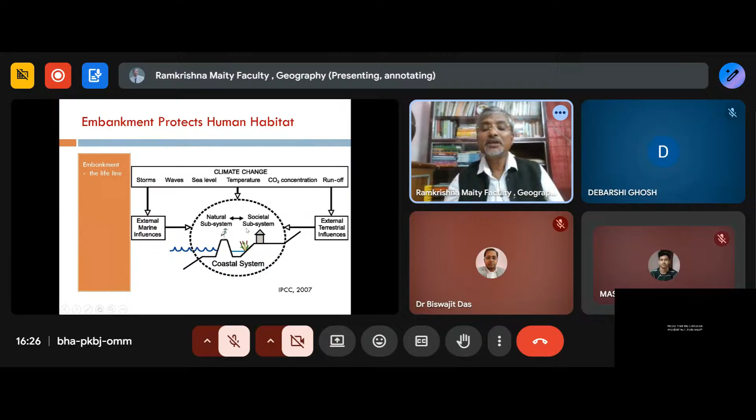Now sometimes this becomes inappropriate. If we take the example of Indian Sundarban, land was reclaimed by construction of embankments along both sides of the tidal creeks. So embankments were constructed and vegetation was cleared. Erection of embankments and clearing of the forest are two simple mechanisms for reclamation. And this embankment is considered the lifeline of the Sundarban because it differentiates between the saline environment and the socially constituted freshwater environment.

And this technique was borrowed by the British from the Netherlands. You know the polder land. In the Netherlands, this principle was practiced since 1609. And in the 18th century, the British brought this technology for the reclamation of saline or intertidal land in Sundarban. You see the health of the embankments in the Netherlands, how they are maintaining their polders. And side by side, you see the health of the embankments in Sundarban. We are not maintaining it.

Even without any high tide or storm surge, this embankment is unstable. Self-instability is there. They will break by themselves. There is no requirement of storm surge and high tide. This is how the people are protected. And when Aila came, kilometer after kilometer of embankment was destroyed.

Sometimes it is unaffordable too, because huge capital is required to construct such a strong embankment. And this technocentric management reinforces conditions of underdevelopment, exploitation, and poverty. How? Because most of the foreign aid is siphoned off by corruption. Most of the available capital is spent on sophisticated technology. And then the poor who are actually affected don't get much for their recovery.

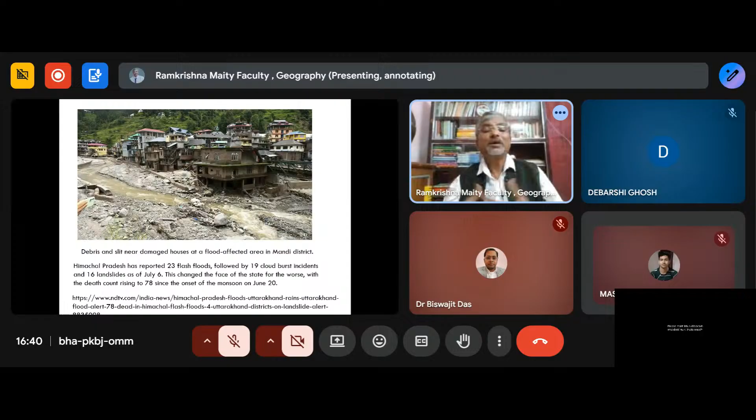And if you look at this picture, say it is the river, and people enter into the river. They don't give any space to the river, and a small embankment was constructed. And people found that this is a protecting structure. Okay, and in this condition, if disaster occurs, then whether the disaster is responsible, or the natural forcing is responsible for the damage, or the other forces, you have to think about it.

And while a river emerges from the mountain front, it has some characteristic change, because in the mountain, the valley is confined. So the river is within a confined valley. And while it comes to the piedmont mountain front, it becomes partly confined or laterally unconfined. So this boundary condition, it is the permanent boundary condition, or say imposed boundary condition. This boundary condition is changed, and with this change of boundary condition, the entire character of the river is changed. So this we must understand before understanding the flood situations.

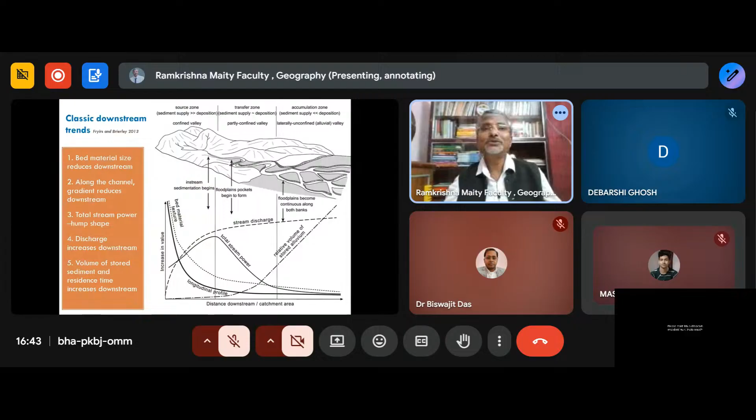Okay, these two things we must remember to understand the nature of the flood and the character of the rivers. In Tista, Torsha, Raidak, Jaldhaka, Kaljani, Sankosh, they have numbers of abandoned channels and back swamps and changing courses because of this. And what is their effect? All those back swamps, all those earlier channels, those are blocked or those are occupied for other purposes. Okay.

The recent report of India Today shows that abandoned channels sank from 24.87 square kilometer to 9.01 square kilometer during this period. 104.05 square kilometer of channel is turned to farmland, and 85.90 square kilometer of the channel land is transferred into built-up areas for Raidak only. Torsha also lost much of its old channel to farmland. Kaljani and Jaldhaka are heavily embanked rivers, and Tista is also disconnected from its wetlands and other channels.

So while much of the discharge comes with this much of energy, huge energy, then that has to be intercepted, that has to be received by some space and some techniques. What are left there? Nothing. There is the blockage by settlement, there is the blockage by bridges, there is the blockage by culverts, and the channel becomes narrower and narrower.

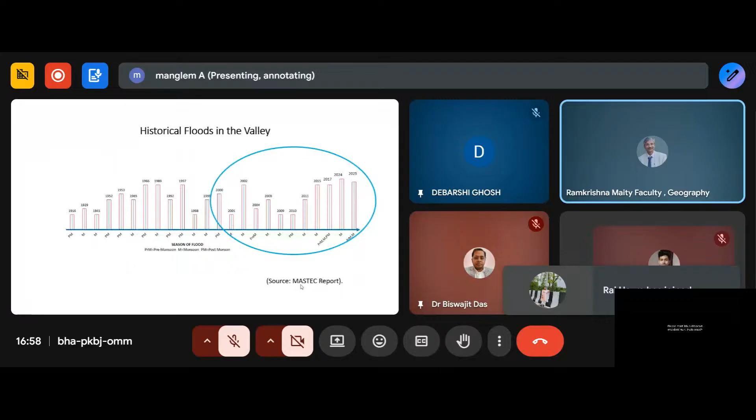Sir, you go for the presentation mode from your PowerPoint. PowerPoint is already open. Yes, you please open the PowerPoint. Click the PowerPoint. Go to the PowerPoint mode. At the bottom ribbon, at the lowermost ribbon, right hand side. Near the volume bar, the cup-like shape, teacup-like shape. Yes, that one. Yes. You please now continue.

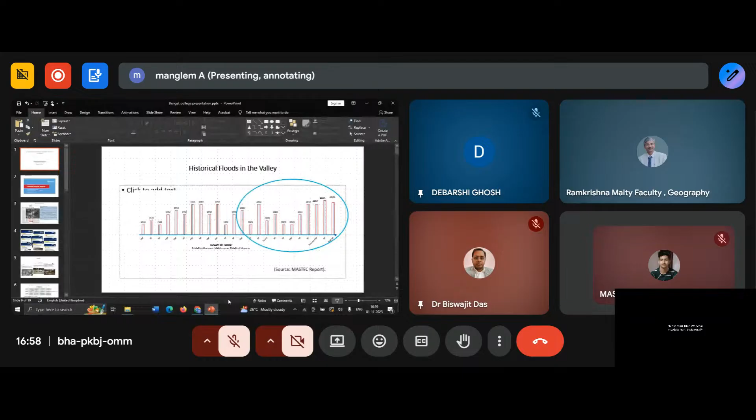But your voice is not coming, sir. Dr. Das, please contact him. Can we do one thing, Professor Ramkrishna Maiti sir? Until Professor Singh settles with this particular technical problem, can we proceed with the next presenter? Yeah. Why not? That would be fine. So Dr. Singh can fix that particular thing. So it would be better, sir. Okay.

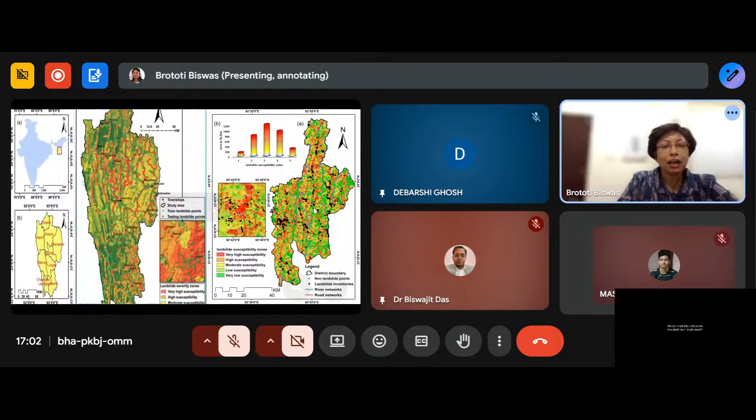So here in the slide, you can see the state of Mizoram. The landslide susceptibility mapping has been done, wherein you can see that most of the places fall under high to very high susceptible region. And particularly this zone, the Aizawl district, and this zone, Lunglei district. These two districts are having the maximum amount of landslides.

So in the inset, you can see this is part of Aizawl district. It is already in the very high to high zone, which you can see from the mapping and also from the various landslide points. In this map, from the various landslide inventories, one can easily understand the number of landslides that we are facing, and this is just a glimpse. There are many more landslides.

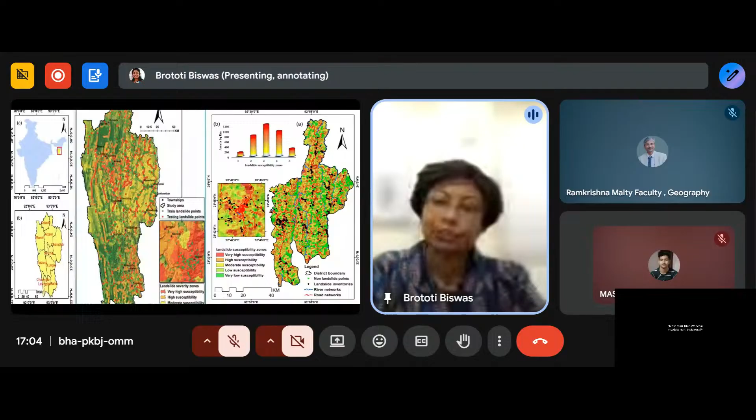There are some landslides which are repeatedly occurring. The area is going on increasing. And some landslides which may have occurred quite some time back are right now dormant. Again, it can occur. And again over here, the maximum part of the district falls under high to very high. This zone is the Aizawl city area, which is also prone to a number of landslide incidents. So in short, in Mizoram, the main population percentage is in Aizawl district, so the maximum persons are vulnerable to landslide, and not only landslide, to the various disasters.

Now, why does Mizoram get so many disasters? That is because we are in seismic zone 5. Since we are in seismic zone 5, we are prone to so many hazards, so many disasters. And just to give you a glimpse, only this year, only within 1 month, from May 24th to early June, Mizoram has reported around this many landslides.

Only in the district, there have been 5 deaths. So this is such a lot of hazard that the region is facing. So what are the vulnerabilities of our state? What makes it so disaster prone?

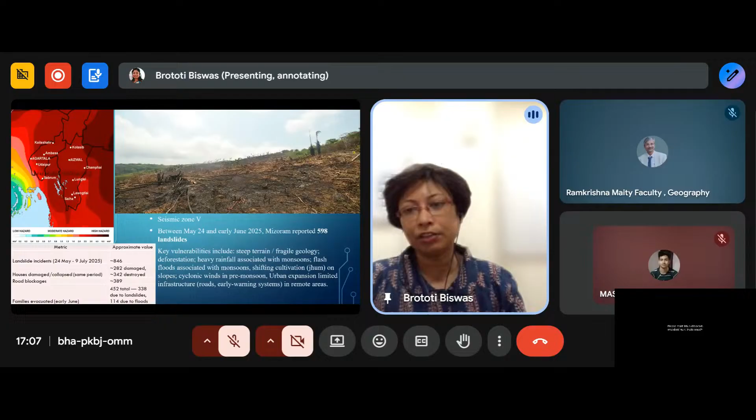So what is the anthropogenic factor? The anthropogenic factor is the jhum cultivation. We are aware that Northeast India has got shifting cultivation. So we have this jhum cultivation, and in this slide, you can see this is a jhum land. So in jhum land, earlier what used to happen is that they used to cultivate this for 3-4 years and then leave this land fallow for 10 to 11 years. So they used to follow this 10 to 11 year cycle. So in this 10 to 11 years, the forest would regenerate itself.

Ecology would re-establish itself. But now, because of land and population pressure, that short fallow cycle has started. So now it is no more 11. Now it is just 3 or 4 years or max 5 years. So the land is not able to regenerate itself. And something like this happens in the jhum. The entire surface and the subsurface area is totally destroyed. And I am saying the subsurface because what you are seeing over here are not twigs. These are the roots of the big trees.

And so the fire not only destroys the entire covered soil, it also destroys the roots underneath. When anyone goes to these jhum sites, we just see the skeletons of these trees, the root systems. So the entire slope is destroyed. There is nothing to protect the slopes. So that makes the slopes very much vulnerable. So when there is a triggering factor, heavy rainfall, obviously we have the landslides, we have the entire soil of this region being shifted downhill.

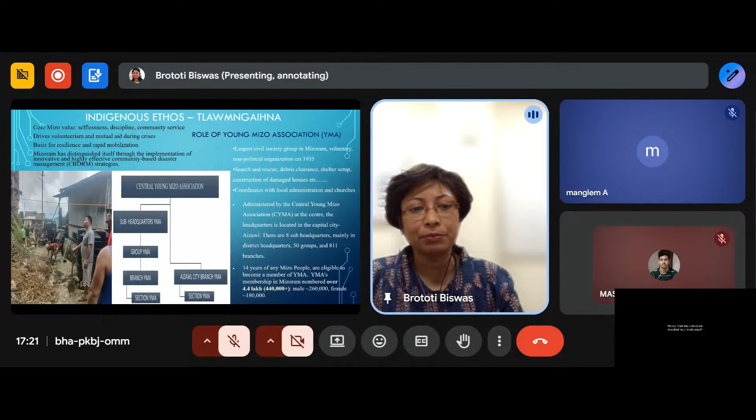So if there is a death in the family, it is these people, the YMA people, who come into action. They will stay back with the entire local group. They will stay with the family, with the deceased, with the dead body the entire night. They will sing, they will pray with the dead body, with the family members.

And not only that, because Mizoram is a Christian state, they will also take part in the digging of the graves, the funeral, the prayer meetings, everything. And they will supply food and all the other requirements to the deceased's family. So you see that the people do not have to worry about anything. Anything happens, the responsibility is taken up by the YMA people.

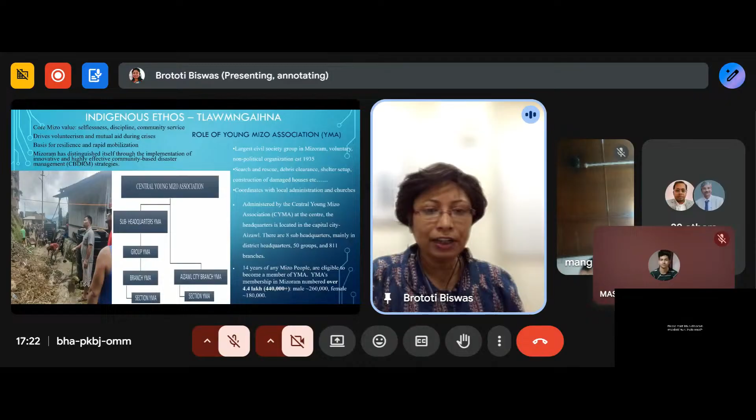I will give you another example which just recently occurred in our university area. Our university is close to a village, and each and every village has its own local YMA. During the recent rainy season, one person had gone to the forest and somehow gone missing. So for 10 days, the YMA people of that village searched the entire forest area in this locality for this person. Such is the concept of mutual aid over here.

So in the YMA association, at the center we have the CYMA, whose headquarters is in Aizawl. And then we have sub-headquarters in each and every district. Any person above 14 years of age is able to become a member. And so this was all about the YMA, but then there is something more.

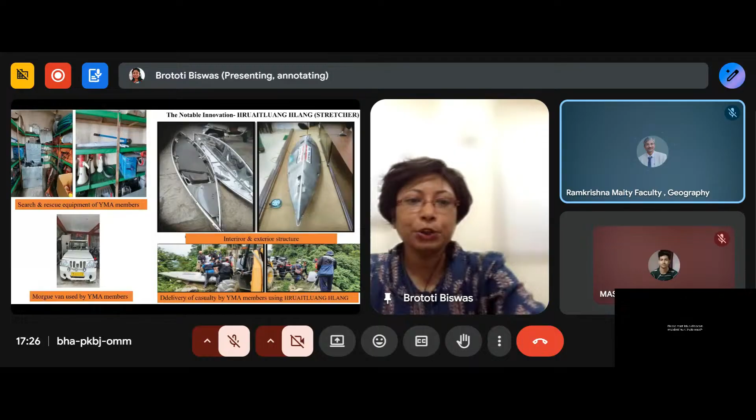So here there are some more evidences. We also have church-based resilience, wherein the church comes in with their own shelter homes, donations, food, volunteers, etc. The village councils are also helping in their own indigenous ways. And we also have the traditional knowledge system, which incorporates bamboos, because bamboos are quite rampant in Mizoram. So bamboo-based slope stabilization is there. The youth and women also play their part. We have a number of SHGs, and through the SHGs, the women play their part in resilience.

Technology is also coming in handy these days. So technology together with the YMA, churches and also the MSDMA. All together, we are seeing how resilience is being worked out over here. So these are some of the recommendations. In short, the recommendation is to map hazards in such a way that indigenous cues and indigenous knowledge are taken into acceptance, and there should be more community-led preparedness. There should be more mitigation followed by bioengineering ways. I'm not going into details about the various bioengineering ways.

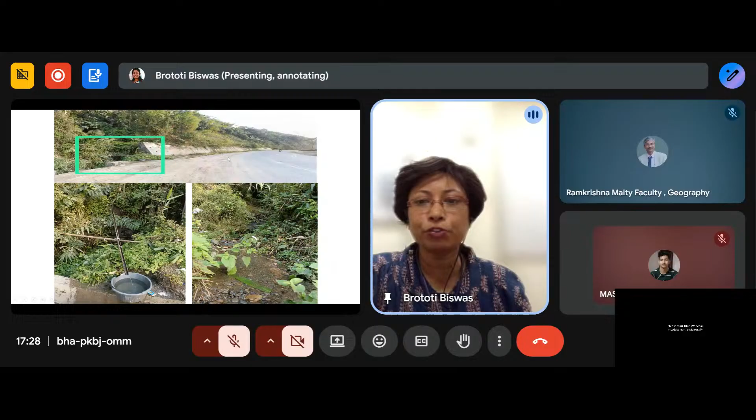Just wanted to say about the springs. So you see over here the spring which was once here, because of the anthropogenic reason of road construction, has now gone inside the forest. This is a bamboo drainage pipe. So because of this, what is happening? The entire land is getting soaked because the water is not able to come out from its actual position. So things like this are occurring where we are seeing land subsidence. These things should be avoided.

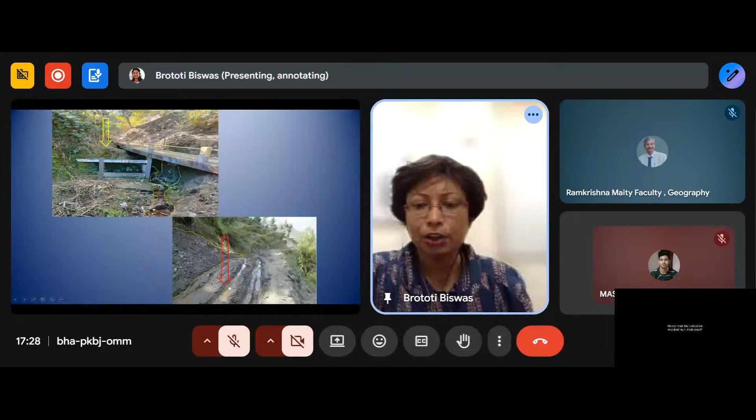So these are again some pictures. I won't go into the details. You can see this particular area was built for the BPL people, but one night the entire thing came hurtling down. So I would just conclude over here. In Mizo, it is Ka lawm e, or thank you. So thank you. I end my presentation over here. And now, if there is anything.

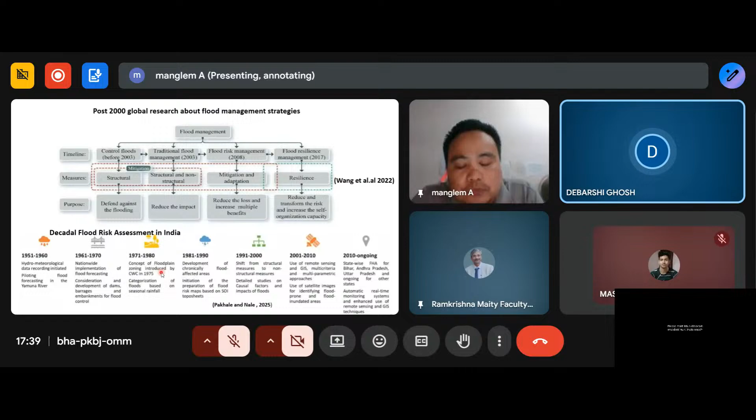Hello, sir. Your voice is not coming, sir. I think the station has stopped, right, sir? Yeah, I think, hello. Yes, sir. Your voice is clear. There might be some network issue. Bishwa, Dr. Bishwajit Das, can you? Yes. I'm informed. What is the problem? Dr. Das, have you been able to connect him? No, I'm calling, but give me a second. Okay. So, Ramkrishna sir, what should we do right now? We can start with Manasi. Yeah, if you permit. Manasi, are you ready? Dr. Manasi Debnath. Yes, sir, I'm ready. Okay, you can start now.

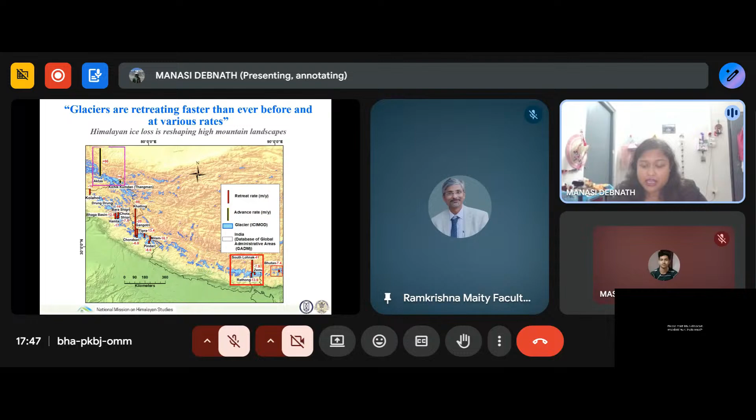So ice loss in the Himalaya is reshaping the high mountain landscapes, but that ice loss is not similar at all places. The east-west extension of the Himalaya, the Hindu Kush Himalaya, shows large variability in glacier dynamics. Towards the eastern Himalaya, glacier ice recession is much faster than in the western part. Even towards the northwest Hindu Kush Himalaya, some of the glaciers exhibited advance signatures. So we found that there is a highly variable nature of glacier character, even if they are retreating as well.

So keeping this in mind, we found that there is an urgent need for local scale study and research. And why is this necessary? Because nature is always changing at various spatial scales. When glaciers are retreating, many times they form lakes, but their dams are not stable. Fragile moraines, buried ice, and permafrost degradation amplify the risk of glacial lake outburst floods.

We may find such lakes on the glacier, just in front of the glacier, or along the glacier, in between the lateral moraine and the glacier. These days, there is a high tendency of forming new glacial lakes. One such example is the Menthosa glacier. This is the Menthosa glacier.

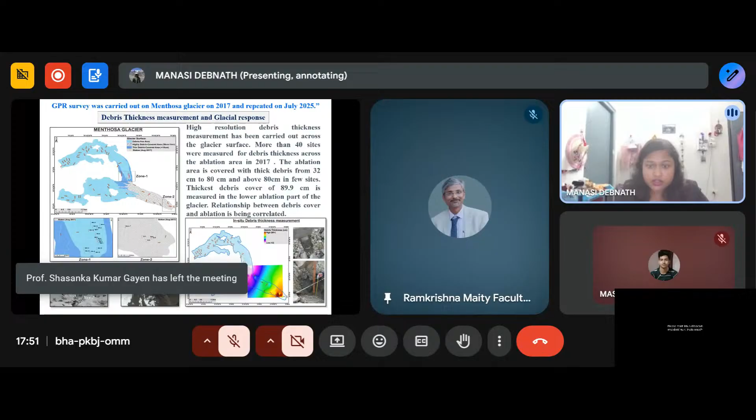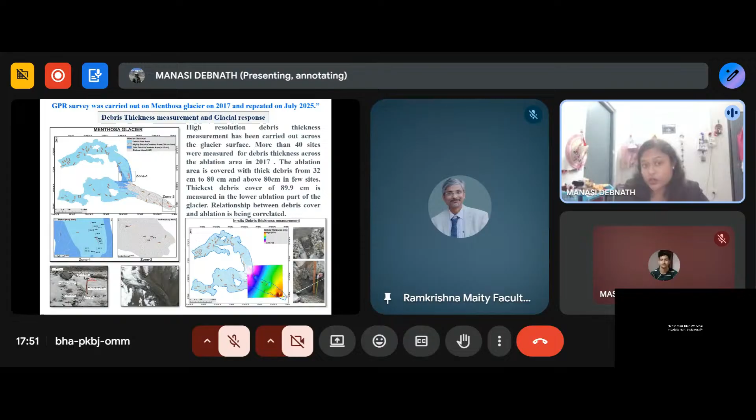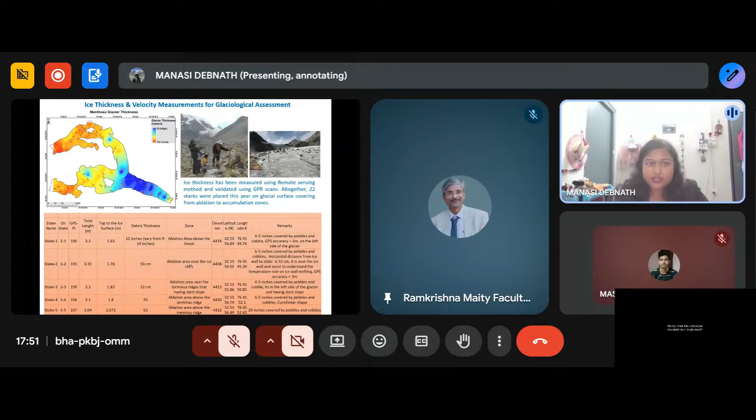Then, to identify various characteristics of the glacier, such as glacier thickness, we did a GPR survey, ground penetrating radar, on the glacier surface, basically from the equilibrium line altitude towards the ablation zone. It informs you about the thickness of the glacier. This survey was carried out from the beginning by the Jawaharlal Nehru University group since 2017. This year, we did a repeat survey in July 2025 to identify how much thickness has been reduced.

In 2023, there were very few, very small supraglacial lakes, but in 2025 the small lakes merged together, and within one month they formed a huge lake of around 0.27 square kilometers of area, and caused devastation.

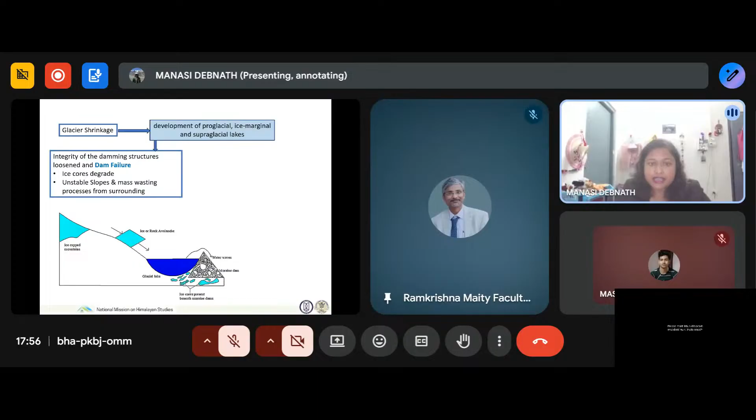So with this, we need to identify what type of events can happen. As we have focused on GLOF, it's generally caused by glacier shrinkage, then the development of different types of lakes, such as proglacial, ice marginal, supraglacial, and then the loosening of the damming structure or material. What is the type of damming structure? Those things need to be understood, because the loosened integrity of damming structures could lead to dam failure, and then it could generate water waves.

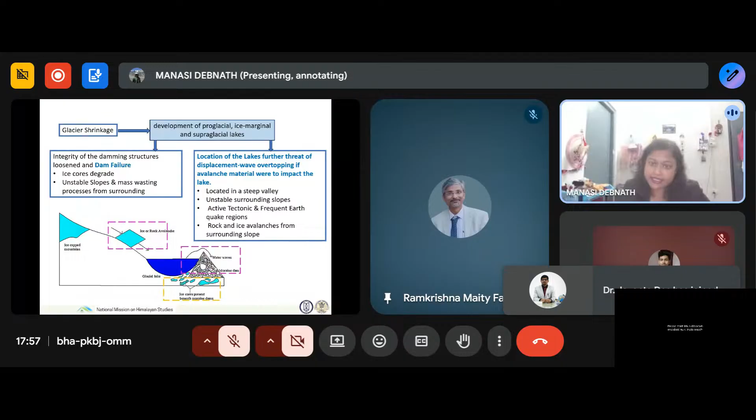Sometimes they can also destroy the moraine dam. Therefore, ice or rock avalanche is a very important parameter, and the location of lakes could be a further threat of displacement waves and overtopping if avalanche material impacts the lake. So shape and locational factors, active tectonics or frequent earthquakes, rock or ice avalanches, these factors are very important to minimize the risk. Therefore, the first step is to precisely determine glacial lake inventories and their variability, then find the most potentially dangerous lakes, and then monitor the factors.

So the aim of our ongoing research towards disaster risk reduction from these events is to identify and monitor important lakes, find the potentially dangerous glacial lakes, and monitor the probable factors for DRR. The case study is North Sikkim, Lachung Basin, which has an area of around 768 square kilometers, altitude varying from 1,790 meters to 6,755 meters, and peak precipitation during the monsoon and post-monsoon seasons.

For this, we use many remote sensing data as well as field data. We do glacial lake mapping, and then we go to the field and collect samples for ground truthing and accuracy assessment. Then we do glacial lake volume estimation using previously established methods. And now we ourselves are doing a bathymetric survey. We have started, and we will come up with our own data and formula.

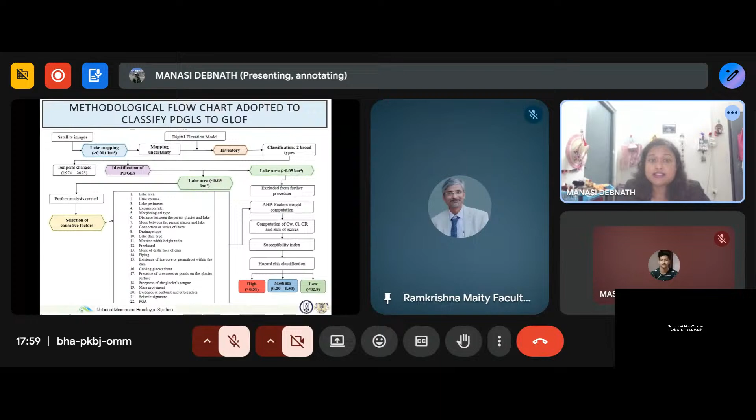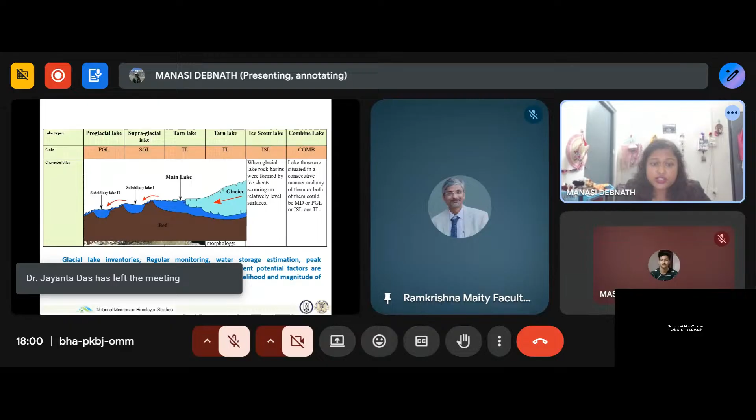This lake is called a tarn. And this is a combined lake. These are very dangerous. This is one of the potentially dangerous glacial lakes we are also studying. Therefore, to manage GLOF hazards, it is very crucial to assess the likelihood and magnitude of such events.

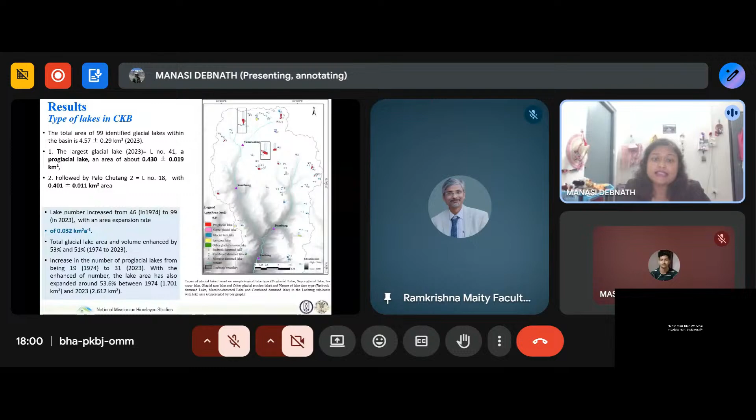Here in this basin, we have around 99 glacial lakes consisting of 4.57 square kilometers of area, and the lake number, we have found, has doubled since 1974, and the area as well. So therefore, it is very important to study this basin. We have found proglacial lakes are highly vulnerable.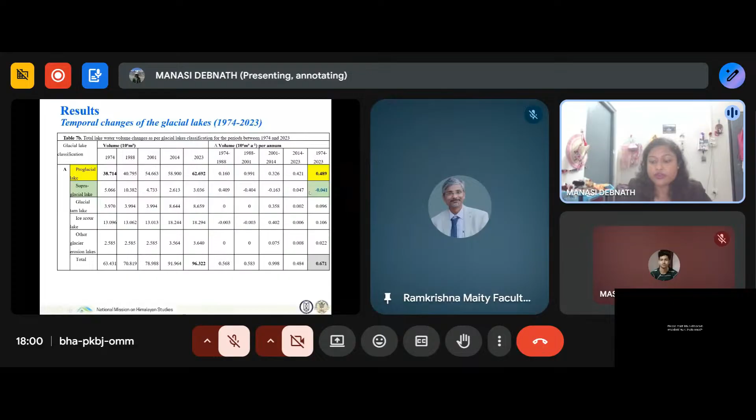Again, supraglacial lakes, you can find here, the area has decreased since 1974. Why? Because there was a GLOF event. I'm not talking about South Lonak, because that is in another valley, another basin. We studied in Lachung Basin. So there was one GLOF event, but it was in 1998. It happened from

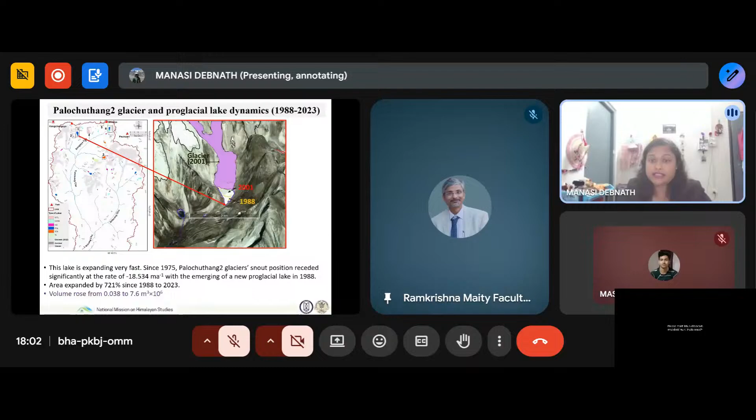So these are the breaching event deposits you can find here, which occurred in 1998, and this is 2023. There is another glacial lake, Palochuthang 2. We have found in 1975 there was no Palochutang 2, but it appeared as a very small pond in 1988, and now it has increased. It expanded its area by 721% since 1988, and volume rose from 0.038 million cubic meters to 7.6.

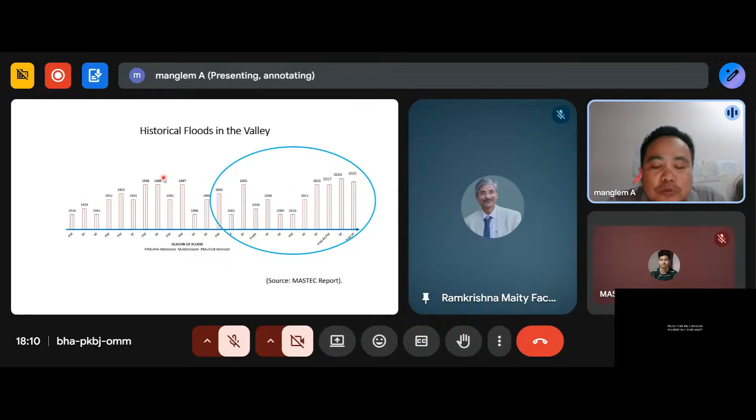So the idea is we get a lot of floods, and in terms of the districts, these are all districts. So my point here is that the Central Valley of Manipur, which houses almost 60% of the state's population, has seen floods in many years. So this is a timeline of floods, and floods have occurred in different seasons, and the height of these bars roughly corresponds to the severity of the floods, and these are the years in which those floods have occurred. And one very striking thing about this timeline is that in the last 20 years or so, that means since 2000, we are seeing very frequent floods of significance.

So as one could observe, since 2000 we have almost witnessed 13 floods, which is almost equal to the number of floods that the valley witnessed in the past 7-8 decades. So it's safe to conclude that in the Central Valley of Manipur, the floods have become more frequent, and at the same time more intense. And it also shows that whatever measures were taken for flood management and control have failed to date.

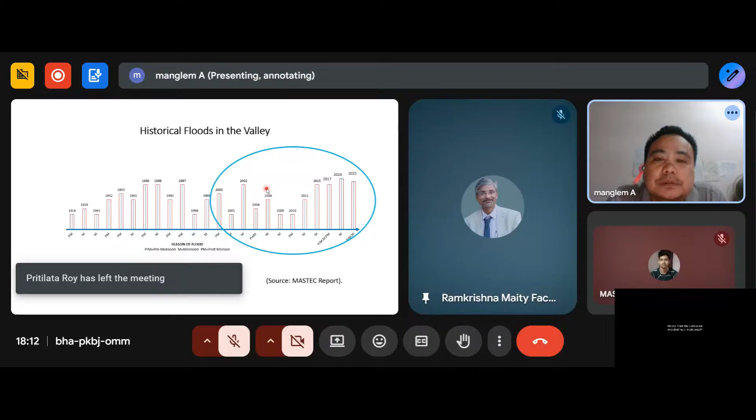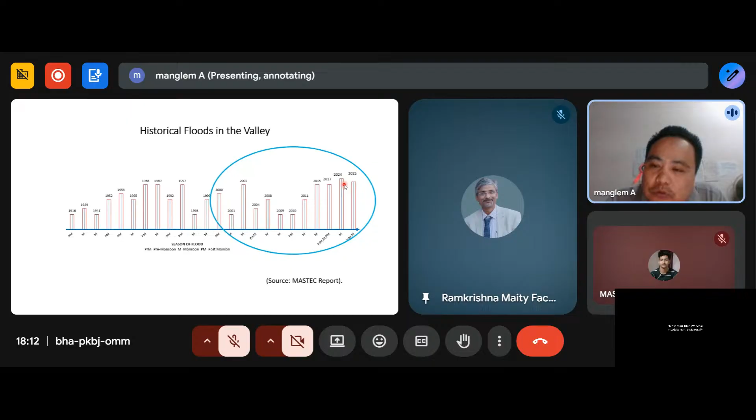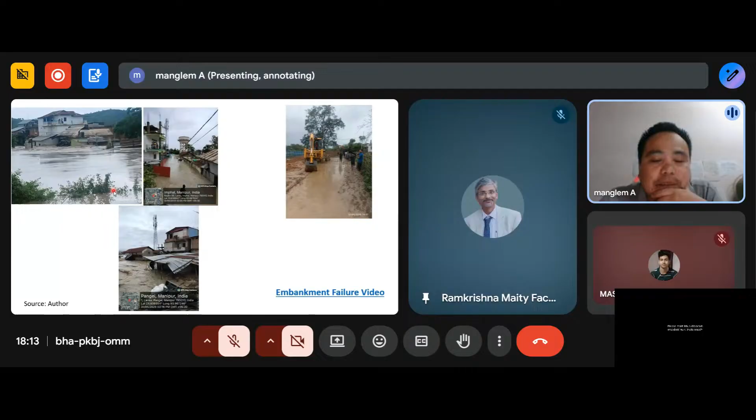And these are some of the pictures that I took. And here, these pictures show many things. For example, as Professor Maity also highlighted, floods, although they may seem to be a natural event, we have tried to contain them within the channels of the river through technology, by construction of structures, embankments, and other structures. But what we see is that the same flood that occurs does not bring equal devastation to all the people in all areas. The prime example is this house here, and the one that was situated over here, which was dragged by the water when the breaching took place on this bank here.

So one could see the interplay of socioeconomic conditions, the cultural context with the physical factor here. So the impact, as one could observe here, is that although this house and this house were exposed to the similar flood, the impact is quite different. The house here has already been dragged by water, and we can no longer see it. And let me again further highlight this point, how impacts of flood and disasters are shaped more by the social and physical conditions, social and economic and demographic conditions, ultimately determining their vulnerability. There is a short video here, which I will skip since it's already late.

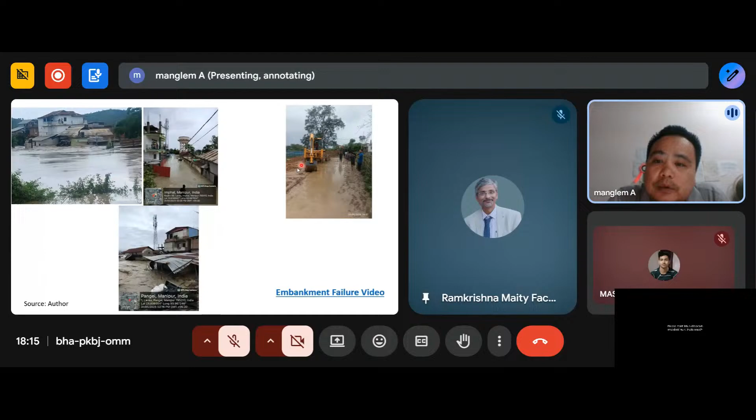And in terms of the measures, what we see in Central Valley of Manipur, when we talk of flood measures, I think we tend to focus more on embankment construction. So this is a knee-jerk response to the rising water of this river here. This river, how locals along with government officials are trying to strengthen the bund that was already there in a very knee-jerk type of reaction. So there is not much talk on how we should adapt and take up other measures apart from construction of embankment and strengthening of embankment. So that prompted us to look more on the adaptation aspects, whether the flood-affected people are ready in terms of their adaptation measures and what type of adaptation measures they have adopted.

So a very simple argument here is that we need adaptation, because the kind of devastation that we have seen from flood across the world shows that the structural approach of the past generally has failed. And in fact, it has sometimes resulted in increasing and amplifying the impact by instilling a false sense of security, thereby leading to construction of more houses and other structures that exposes more people and infrastructure. So structural approach alone instills false sense of security, resulting in increasing long-term exposure. This has been observed in different parts of the world, including in Manipur also.

Here we have seen many areas which were not populated. Now we see a lot of infrastructures being built, largely because embankments were built and they were successful for part of the time, but they have failed in a very severe manner in the recent past. Therefore, one needs to look for other measures, combining the structural approach with non-structural approaches like spatial planning, early warning system, community preparedness. Ultimately, we need to enhance our adaptability and resilience. Here, our argument is that adaptation is important, especially at the household level, because the government and the structural approach are highly government-centric as well as very...

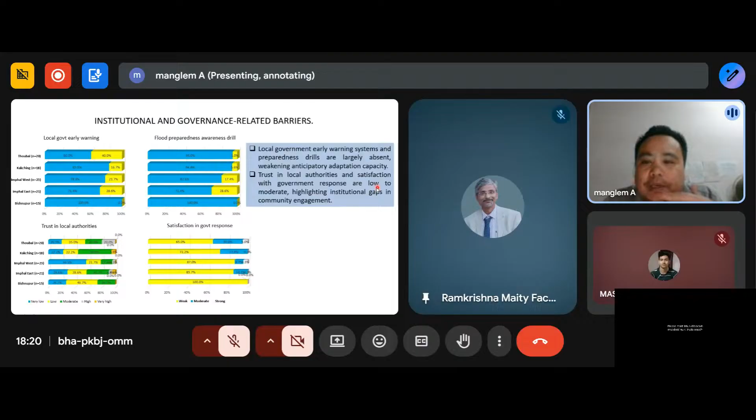And in terms of institutional and governance related barriers, we find that local government early warnings and preparedness drills are largely absent, weakening anticipatory adaptation capacity. So institutional barriers are still there. And in terms of trust that people have in local authorities and satisfaction with government response, they are also very low. So it means there are institutional gaps. Therefore, it is all the more important that households need to be prepared, because institutions generally take more time and have more inertia to change.

To conclude, sir, I would like to argue that floods have become inevitable because of various reasons, including climate change. Therefore, the approach, which earlier focused more on structural measures, needs to diversify, including non-structural measures, which can enhance people's adaptive capacity to reduce impact. And in terms of findings in the Central Valley of Manipur, we find that adaptation measures are there, but low effort ones are more common, whereas because of cost barriers and institutional barriers, the high effort ones are mostly absent.

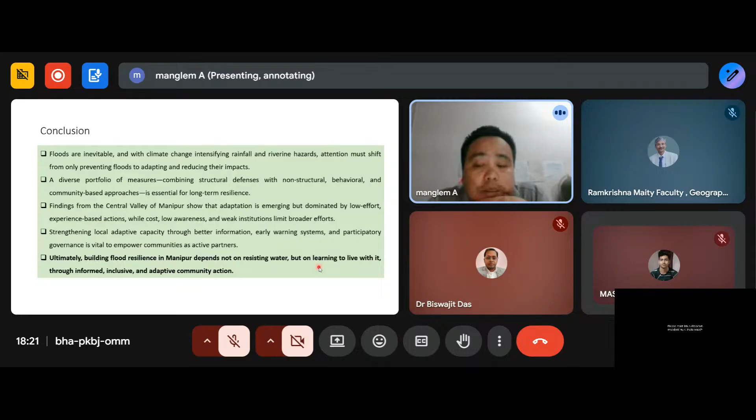Ultimately, building flood resilience in Manipur or elsewhere depends not on resisting water, but on learning to live with it through informed, inclusive, and adaptive community action.

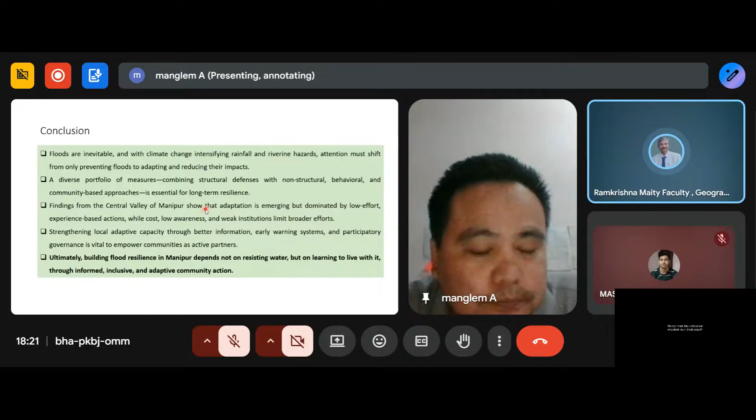Next presenter, I think, is Siddharth Agarwal. Sir, with your permission, can I introduce him? Yes. I met Siddharth in Presidency. He's a very interesting person. He's the founder of Veditum India Foundation, Kolkata, a research platform working on river systems and environmental governance in India. He trained in engineering. He's an alumnus of IIT Kharagpur. But what he is doing right now, he has left his job and he's

walking along the side of different Indian rivers. He has already walked almost, I think, 3,000 kilometers. It's a project, right? Moving Upstream Ganga. And right now he leads a platform called India Sandwatch. It is an environmental open data platform which connects with environmental accountability projects. So they are working nowadays on river sand mining. It is a very good platform.

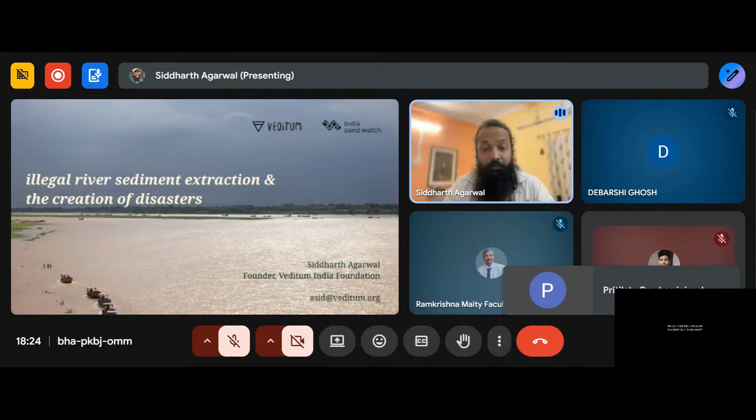All right. I will try to take less time because I think we're quite over time today. As opposed to a lot of the other presentations, which have been technical and very enriching and a good learning experience for me, I will talk specifically about the challenge of illegal river sediment extraction and how it's leading to the creation of disasters. And I'm very thankful to Dr. Debarshi for inviting me to share our work and talk about illegal river sediment extraction from the perspective of disasters.

As Dr. Debarshi mentioned, I run an organization called Veditum India Foundation with a long-term vision of transforming how environmental governance happens in India. And disasters form such a key component of environmental governance, which is not fully looked at as a linked mechanism, but sometimes as isolated mechanisms. One of the key things we're trying to do through our projects is to create evidence at scale.